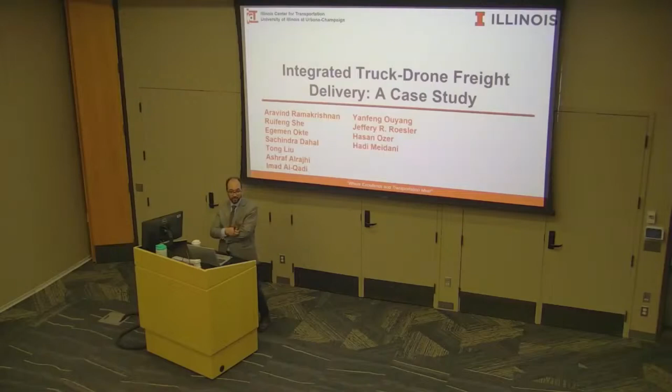And also, there are PhD students from those groups in the audience, and if needed, they can provide more details about the implementation. All right, so what is truck platooning?

Truck platoon is a group of trucks that can travel very closely to each other, almost like a train. So the headway is going to be smaller, and then that has various advantages. If you can have a platoon of trucks traveling together, then it will lead to more regularized traffic, and it can improve the traffic flow because there's going to be less braking and accelerating involved, and the congestion is going to be reduced because the background traffic doesn't have to pass trucks, so all the trucks are platooned together.

Another advantage, which is arguably the more important advantage, is the lower fuel consumption and emission that is associated with the reduced drag force that is applied on the platoon compared to the case where trucks are individually traveling over a road.

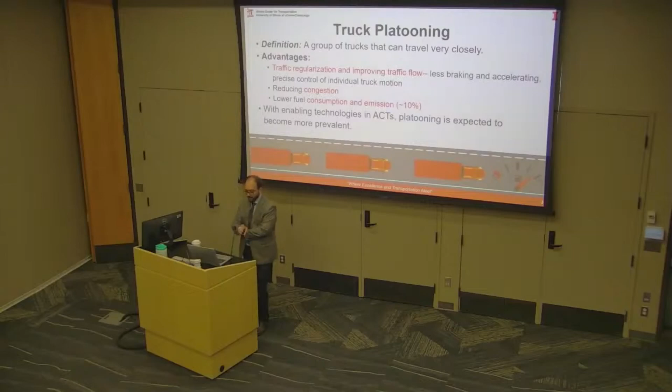So with the new and enabling technologies that we have in autonomous and connected transportation, platooning is becoming more and more doable, and you'll see this more and more prevalent. All right, so here's a big overview of the research interest that we've had in this project so far.

As I said, this is a holistic look at this integrated platoon, truck, and drone delivery system. On the top, we're looking at the impact or the benefits or costs associated with the facility side of it, what's the pavement performance if you have an integrated system. We're also looking at a new technology that can be embedded into the roadways in order to provide more opportunities for precise positioning of platoons. So that is a V2I communication system that I'll present momentarily.

Then at the bottom, we have the operational aspects of it. So if you have a platoon of trucks, how do you quantify the fuel saving due to the reduced drag force, which is a function of the speed of the platoon and also the wind direction and wind speed. And eventually, how can you have an optimization and control framework that can optimize the spacing of the platoon and the lateral positioning given the particular wind characteristics that you face during the trip.

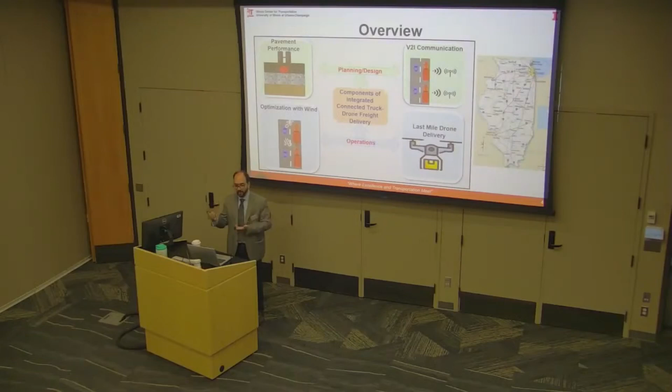The objectives in this work and the results we're presenting fall into 5 categories. The first is planning and design of a facility suitable for this integrated system, creating an embedded passive sensing material system in the platoonable section, and studying the cost and safety benefit associated with controlling the lateral position of freight trucks.

The other goal is to quantify the damage caused by channelized traffic flow, meaning truck flow moving in platoons. Since the flow is more channelized, that pattern causes more damage to the pavement. We want to quantify this pavement damage and study ways to reduce it, examining how it changes with respect to spacing between trucks, lateral positioning of the truck, and the number of trucks in the platoon.

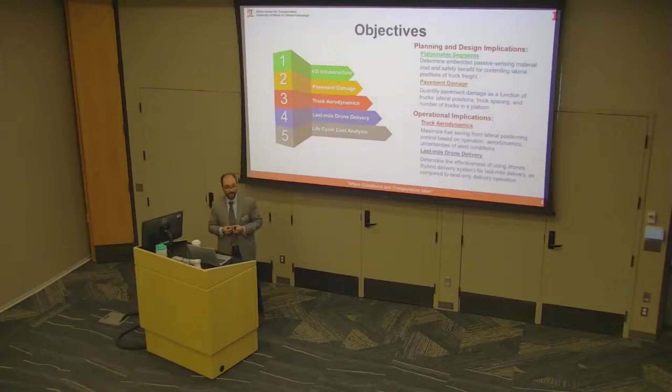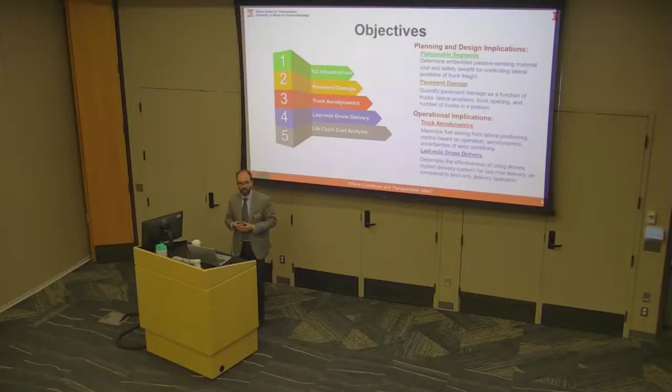Once we've set up these 4 systems, we also do the life cycle cost analysis in order to calculate, over a long period of time, how much the system will cost and what the excessive fuel consumption is for different options. The goal is to compare the costs and benefits of an autonomous, connected platoon system together with a drone system versus the traditional truck freight delivery.

The path we're considering for this case study is shown here. The origin and destination are almost 100 miles apart, and the main goal is to provide the agency with a complete picture of the implications of the policies they're considering on truck and drone freight delivery.

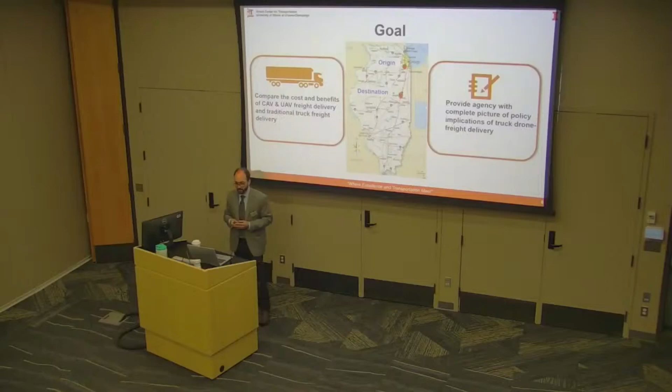I'll begin with the first task, designing an embedded system for the roadways to improve the lateral positioning of trucks. This is V2I sensing for lane keeping, a very important factor for safety - 50% of fatal accidents are linked to lane departures.

The idea we're pursuing is to place a continuous electromagnetic signature near the middle of the lanes. This channelizes the Earth's magnetic field, and if you have a magnetometer installed on the vehicle, deviations from the center of the lane can be captured. So we channelize the electromagnetic field on the roadway, and then deviations can be detected.

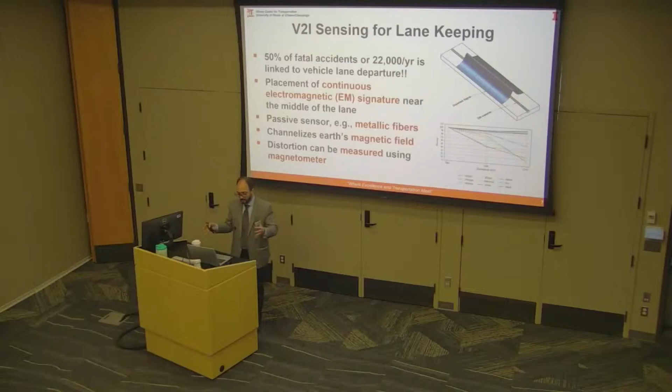Professor Roesler at the University of Illinois and their students ran actual tests to study the effectiveness of the system, including lab testing. They considered different configurations of the dosage of the electromagnetic material, the shape of the specimen, size and geometry, and examined the implications of different choices.

Field testing is shown here. This is the vehicle equipped with the magnetometer, with 2 cameras on the side mirrors installed to establish the ground truth - the actual lateral positioning in the lane. There's also a camera in the center of the vehicle used to establish an alternative way of doing lane departure warning, based on motion captured by that camera, compared with the errors and effectiveness of capturing lane departure using the magnetometer.

The results, documented in the paper, showed significant improvement, especially in snow conditions where visibility is reduced and the camera may not capture the actual lines on the road and the location of the lane. Especially in those conditions, this electromagnetic field can be very effective, and it could also complement existing ADAS, especially for adverse conditions.

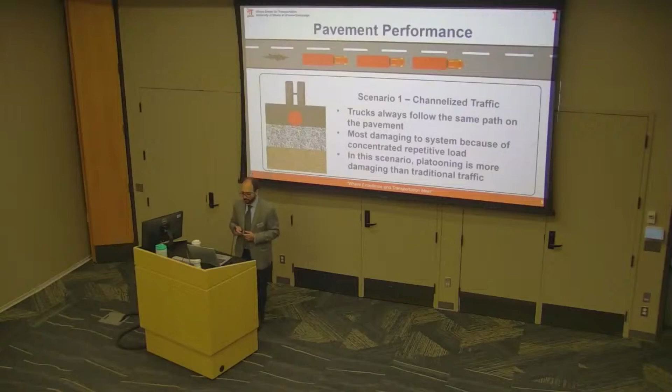So platooning, if implemented this way, is going to be more damaging compared to traditional traffic with more wander. The second scenario is distributed traffic, which could involve platoons traveling over different lines within a lane. You intentionally create some deviations from the center in order to distribute the load applied on the pavement, so each platoon follows a specific path.

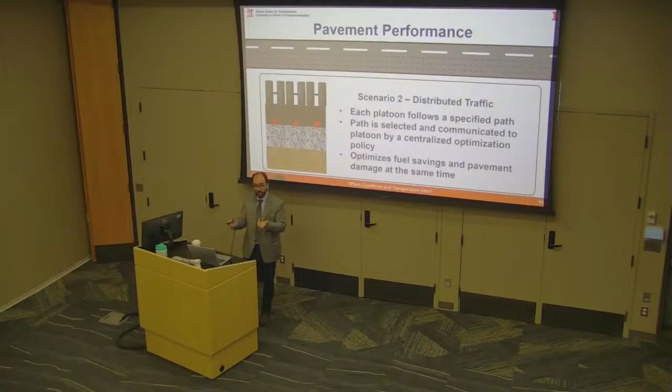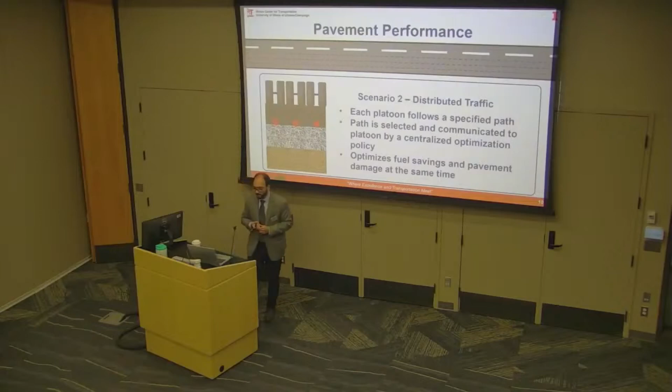The path is selected and communicated to the platoon using a centralized optimization policy. If you're adding lateral positioning within the platoon between different trucks, the fuel consumption may not be as low as a completely lined-up set of trucks. But there's a balance between the fuel saving and the damage on the pavement, and there are papers studying the trade-off between these two.

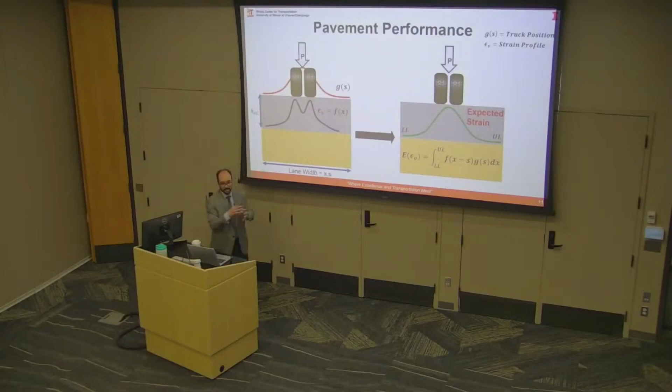Here's a more detailed look at the problem. Consider this cross-section of the pavement and this tire location — the applied, or expected, strain looks like this. If you slightly deviate each passing of the vehicles, that applied strain is going to be shifted.

The third objective was truck aerodynamics and fuel saving. What we wanted to do is consider a platoon of 3 trucks with a specific spacing between them, and a different load direction, wind direction, and wind speed applied on the platoon. To calculate the drag force for each configuration, you have to run a CFD simulation, which is a time-consuming problem to solve.

So our goal was to create a surrogate model — an approximate model that can be trained on a number of training configurations, or available configurations with available CFD results, that can then be used for unseen configurations.

We considered a number of models that can be trained on samples from CFD simulations, then tested them on unseen configurations. The neural network model, for instance, does a very good job predicting the drag force. This is the comparison between the CFD result and the generalized additive model, which is also very accurate.

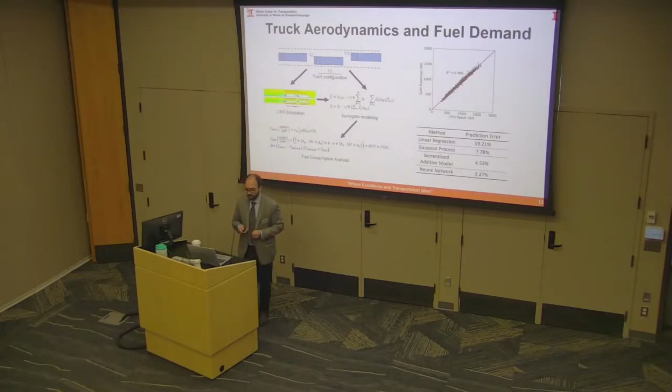This surrogate model can also be used for real-time control of the spacing between trucks. For instance, if the wind direction or wind speed changes, and there are particular damage patterns on the pavement, if you want to reconfigure the platoon in real time, you can do that using these surrogate models instead of waiting for CFD results.

Finally, the fourth component of this research is last-mile drone delivery. The main task is to design an optimal hybrid delivery system where trucks travel on existing roadways, and when it gets close to the destination area, drones simultaneously make the last-mile delivery. Since this is a difficult problem to solve, Professor Ouyang's group studied how to use physics-informed neural networks to optimize that process and calculate the cost.

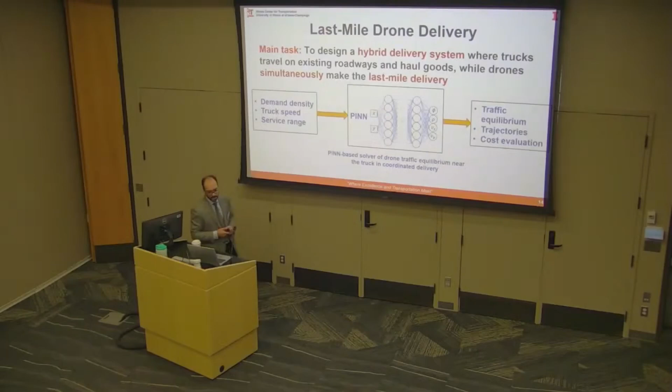The inputs are different demand density, truck speed, and service range. The neural network model then predicts the cost, the trajectories, and the traffic equilibrium for that last-mile delivery.

With that introduction into the main goals of each of the 4 components, we get to this particular case study, where we wanted to implement this system for an actual scenario on a given day in March, with an actual wind profile and measurement, to see the costs and benefits associated with that. The corridor spans from a south suburban area in Chicago to the rural area in Rantoul, a distance of approximately 100 miles.

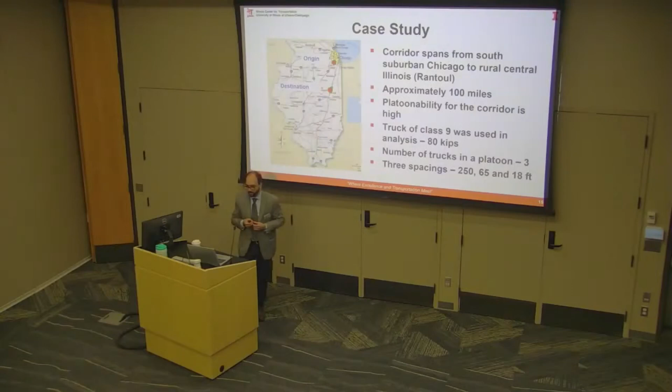The platoonability for the corridor is really high. Truck of class 9 was considered, and the number of trucks in a platoon was considered to be 3. There are various spacings that were considered. For the pavement in particular, there are a number of spacings. For the life cycle assessment and cost analysis, a number of spacings was considered, but for the aerodynamics, a continuous set of spacings was considered.

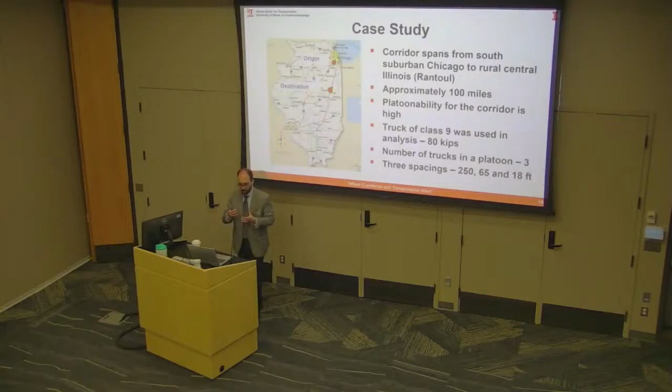We studied the V2I sensing for lane keeping for this area. So if you have 100 miles between Chicago and Rantoul, what are the costs associated with that? The labor cost was assumed to be similar to that of conventional paving.

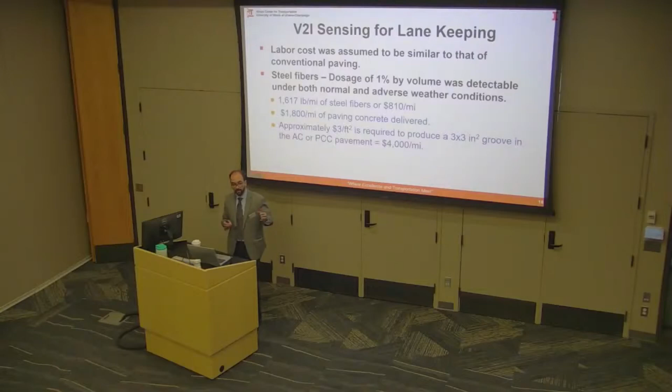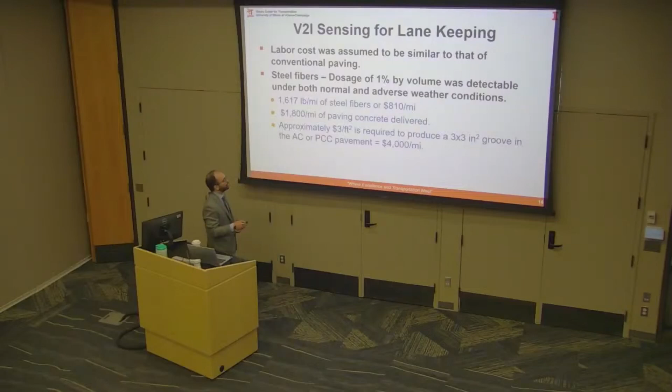The steel fibers designed in this work had a dosage of 1% by volume, because that was enough to be detected under both normal and adverse weather conditions. The cost of the steel fibers is $800 per mile. The paving concrete delivered is $1,800 per mile, and there is approximately $3 per square foot required to provide a 3 inch by 3 inch groove in the pavement, which adds up to $4,000 per mile.

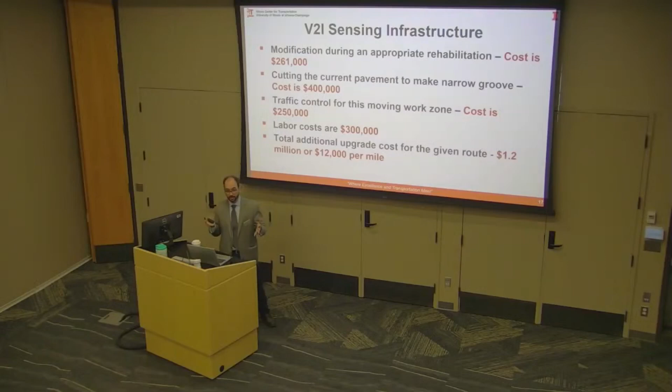These are the total costs associated with implementing this V2I system. The modification during an appropriate rehabilitation costs $260,000. Cutting the current pavement to create a groove is $400,000. Traffic control for the work zone is $250K, and labor cost is $300K. So the total cost is $1.2 million, or $12K per mile. That's the cost of upgrading this segment, creating or embedding this electromagnetic field on the pavement.

So let's see what's the impact on the pavement performance. There are different scenarios you can consider for calculating this impact. The first one is the human-driven truck flow, where there are some natural variations that a human driver is going to induce.

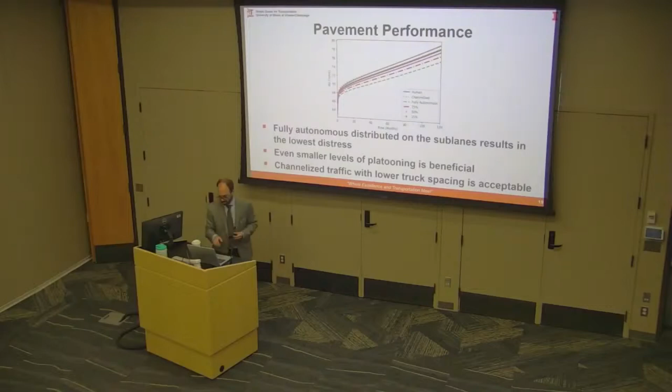The next results for this case study are the truck aerodynamics and fuel consumption. The interstate between Chicago and Rantoul is I-57. We collected wind data from wind stations located in Rantoul and Kankakee, including wind speed together with wind direction during that 24-hour period, I think on a day in March.

Using this actual wind profile, we calculated the drag force on the truck platoon, and that is coming from the trained surrogate model.

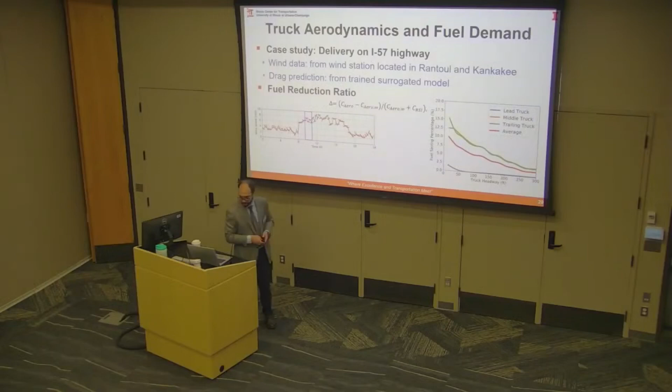All right, so this is the last mile drone delivery results. In the optimization problem, you want to optimize the operation of the system, and there are different configurations being optimized, with different costs and specific parameters considered in this study. All those things can be different, and still the same optimization framework can be used to optimize this operation.

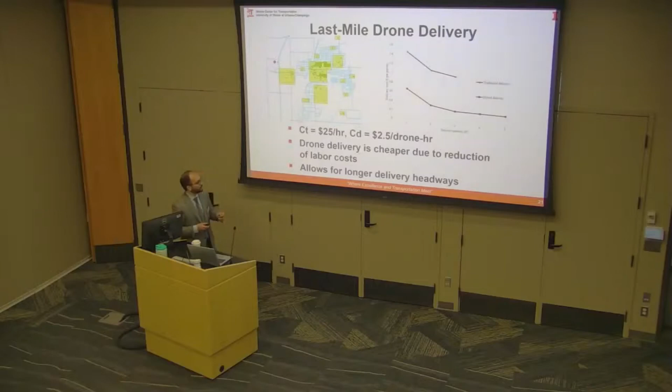Here the cost of running or operating a truck and the cost of running a drone is given. The drone delivery is cheaper because it reduces the labor cost and allows for longer delivery headway.

This is a figure showing the total cost associated with this operation. There are different scenarios considered on the truck side and on the last mile delivery side. The first is when the truck delivery is platooned or manned, meaning human driven trucks. Then on the last mile side, you have manned delivery using vans or trucks, or the truck-drone hybrid system. So these are the 4 different cases.

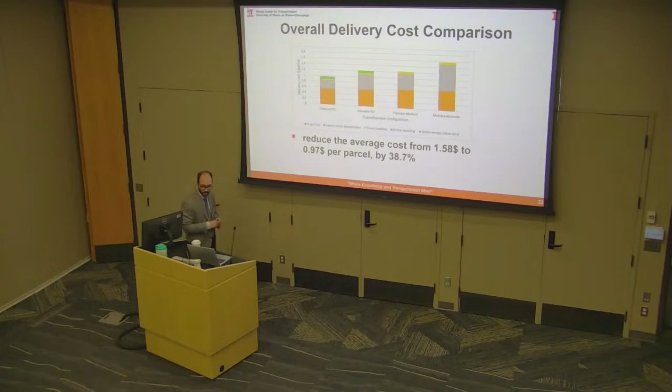On the y-axis, you have the delivery cost per parcel, assuming a number of parcels and the cost associated with that delivery. Then there are the costs here: truck fuel, truck handling, drone energy, and all those parameters included in the optimization problem.

As you can see, the option of platoon plus truck-drone last mile delivery results in the lowest overall cost. The average cost is reduced from $1.58 to $0.97, almost $1 per parcel, which is a 38% reduction.

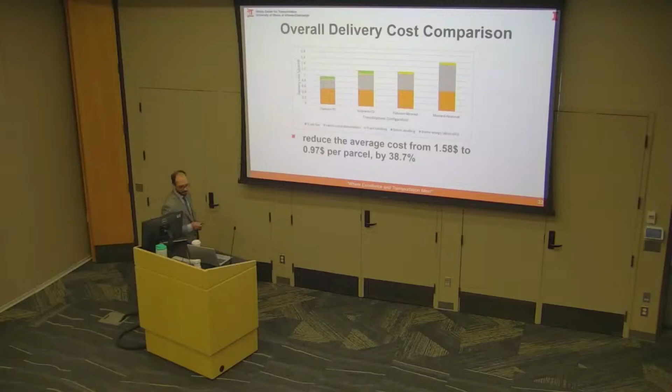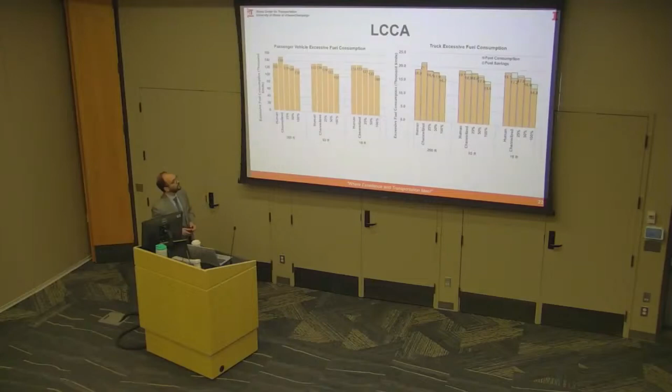So the one in front, these are the fuel consumption figures, and the one in the background is the fuel saving. So for example, in these cases, the fuel saving you get from platooning is more than the fuel consumption, so it actually offsets the excessive fuel consumption. The saving from the platoon configuration offsets the excessive fuel consumption for cases you have platoons. For all these distributed cases, the fuel saving is larger, and in the worst case scenario, they're almost the same as the excessive fuel consumption.

All right, so let's get to the conclusion. Overall, we concluded that the integrated connected truck drone delivery hybrid system was beneficial over conventional delivery operations.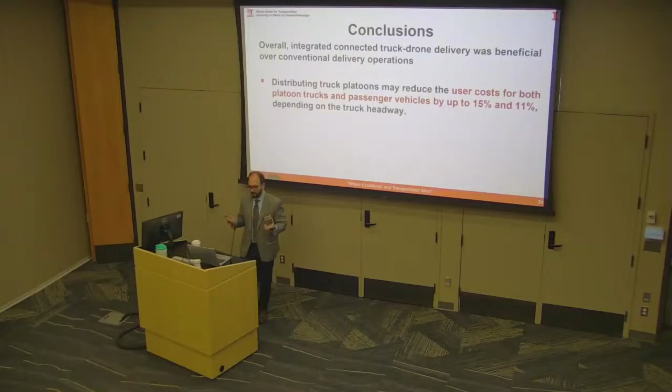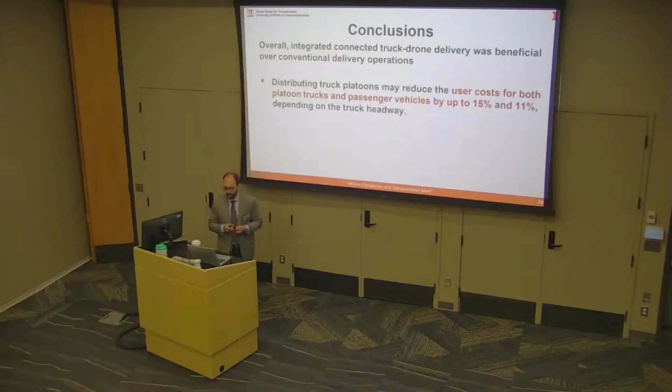We saw that distributing truck platoons may reduce the user cost for both platoon trucks and passenger vehicles by up to 15 and 11%, depending on the truck headway.

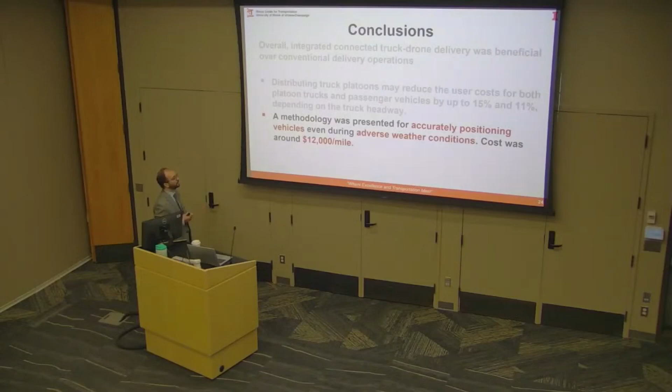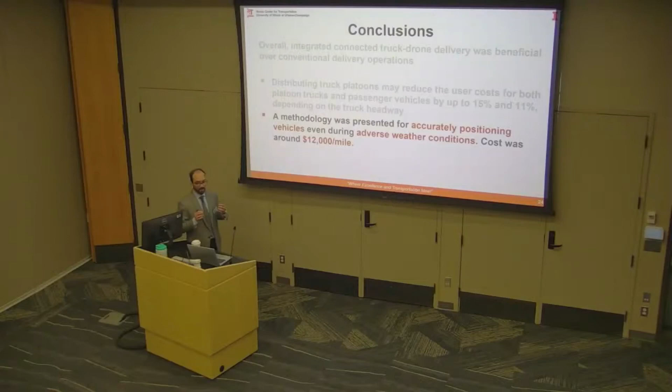We also showed a methodology, or technology, that can be used for accurate positioning of vehicles and trucks that is robust and resilient, especially in adverse weather conditions where poor visibility is going to affect vision-based detection systems.

The cost was around $12,000 per mile. And we saw that the lower the spacing between trucks, the better - it's going to lead to higher fuel saving, and also better pavement performance.

We showed you a neural network and other types of surrogate models that can be used to replace a full-scale computational fluid dynamics simulation that can be used to predict the drag force under different wind conditions.

So the average fuel consumption reduction ratio due to the platoon - the reduction of drag force could be up to 10% for the whole platoon of trucks when the spacing is as small as 18 feet. This was calculated considering various wind conditions between the origin and destination.

The hybrid system of truck and drones incurs lower operational costs in terms of per parcel values, up to 70%. Using drones for simultaneous delivery, the service time could also be drastically shortened. With that, I conclude my presentation and would be happy to take questions.